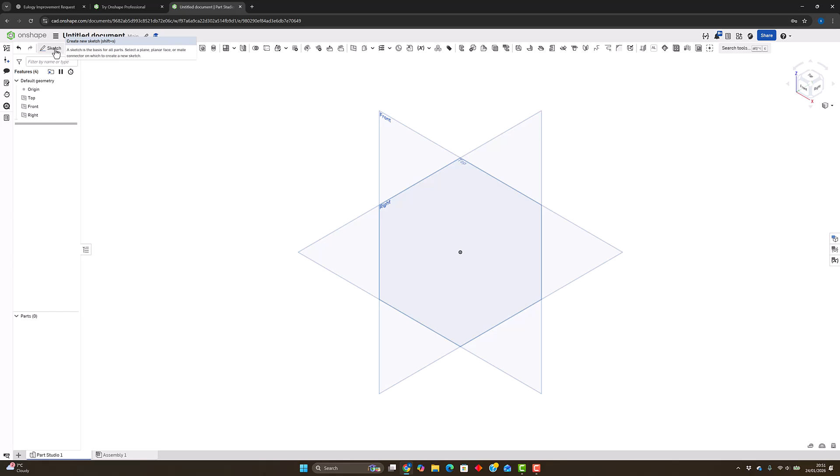So I'm just going to start by creating a revolve. It's something we've not covered on the channel yet. So just like with an extrude, we start a revolve by clicking on sketch. My mouse has just moved up to sketch there, and you'll see the red circles appear when I click. It's then asking me the sketch plane, so I'm just going to click front and then press N. So we've got our front plane there.

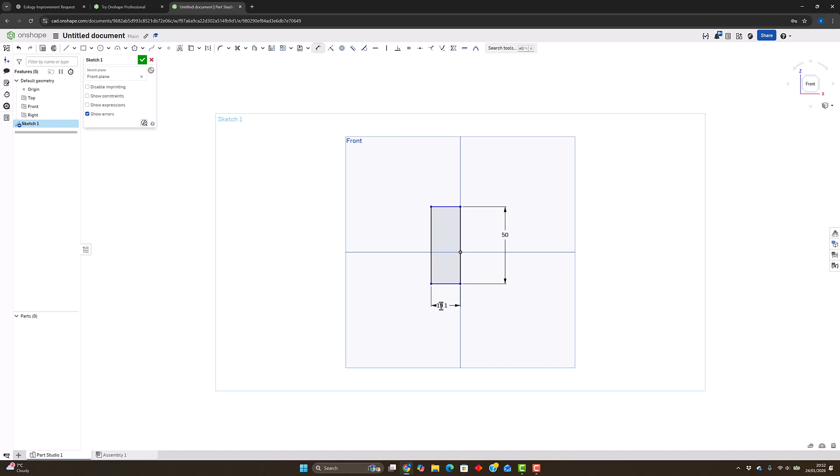Now I'm going to start off by using the corner rectangle, and I'm going to draw a rectangle top to bottom there and dimension that. So this piece is 50 and it's going to be 25 wide. And from the bottom line there to the centre line there, we're going to put that in at 25.

Now it's important when we do a revolve, we're going to revolve around this centre line here, so that's the one that's now highlighted in orange. So I need to keep everything to that side of it. So I'm on the left hand side here. I'm then going to do another corner rectangle just in the bottom here, and we'll resize that to 25 by 10, and I'm going to use the trim tool to delete these parts here.

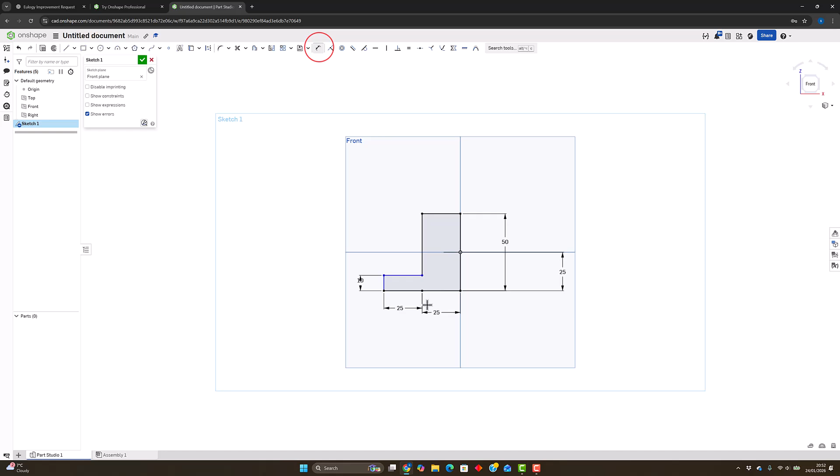Now you will notice that's gone blue. It's because that line is now not locked in place. So if I just put the dimension tool back on, it's now locked in place. So we've got a completed sketch. So I'm going to press the tick. I'm just going to drag this so you can see it in 3D.

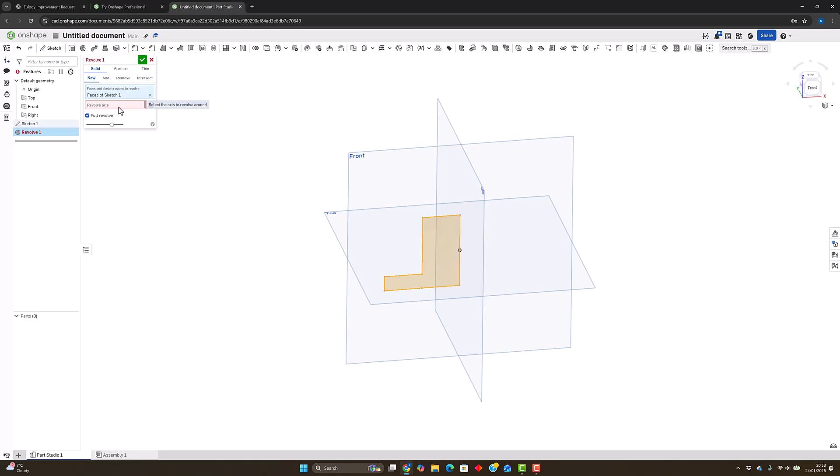And along from extrude, we have Revolve. So I click on Revolve, Faces and Sketches, well, it's sketch 1. And my Revolve axis is this line here. And straight away, it spins round. It looks a bit like a top hat. But imagine this is a foot to go on or something. And what we need to do is we need to put a nut in the top here so it can be threaded on. So we use the captive nut tool.

So you would just press plus and type in captive nut in there. Now I will warn you, it does take a bit of scrolling down to actually find the custom feature. There's quite a few other captive nut documents that it finds, but we are looking for the custom feature. So eventually that one there, captive nut, is the one we're looking for. So mine is installed up here.

So I click captive nut and we can pick our standard. So ISO, ANSI. I'm going to leave it on ISO. I'm going to pick a 10mm nut. It's hexagonal. The nut type is regular or nylock. I'm going to leave it as nylock. And from the menu there, what we've got to do is points to place pockets. So basically, where do you want to put your captive nut?

So we use the make connector button there, and I'm going to click the top, and you'll see the nut comes in. Now this is the great bit about it. If I decide that actually I want it to be an 18mm nut, it automatically updates. So I can change the size of my nuts, pardon the pun, quite easily. So we'll leave it at 10mm there.

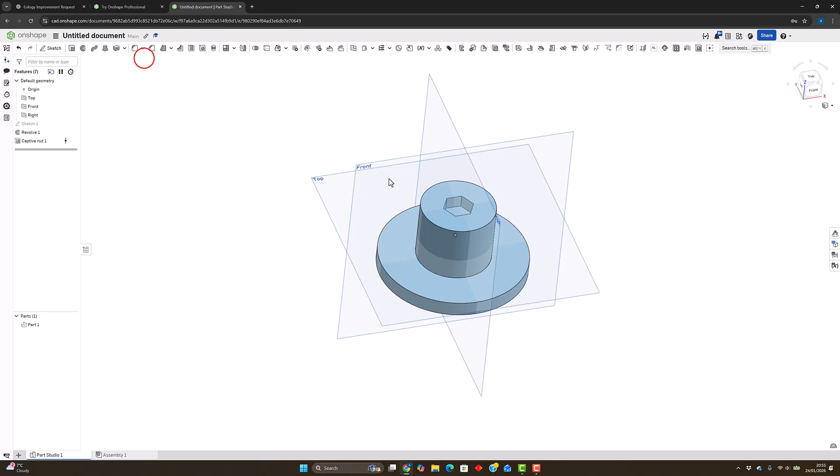The last thing we have to do is tick merge with all. Sorry. Turn that. Click merge scope part 1 and then merge with all. And when you press the tick there, you will then get your captive nut.

So what you could do then is, if you wanted this to be hollow, or you wanted the bolt to pass all the way through, I could click on there as sketch, and from the centre there I can do a hole which is, not slightly bigger, slightly smaller than the nut there. We make it 17.5, so it's just slightly smaller.

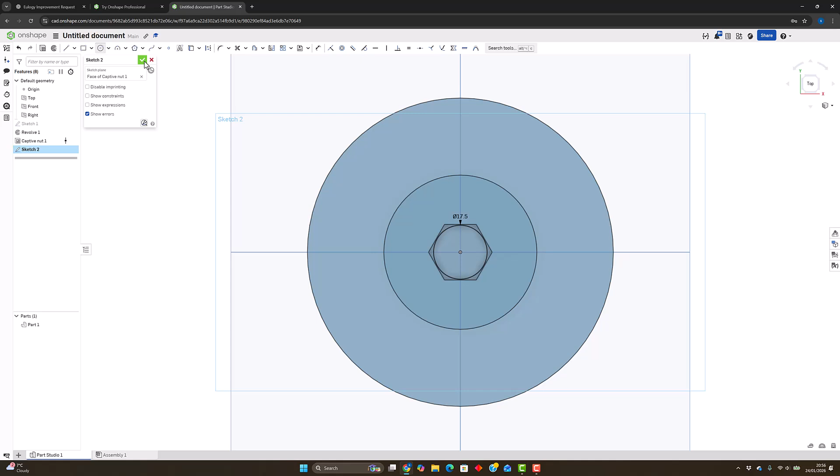Press the tick, click on extrude, sketch, remove material, and if I press the tick there, you can then see there's a chamber or there's a hole underneath that the thread for your bolt can pass through.

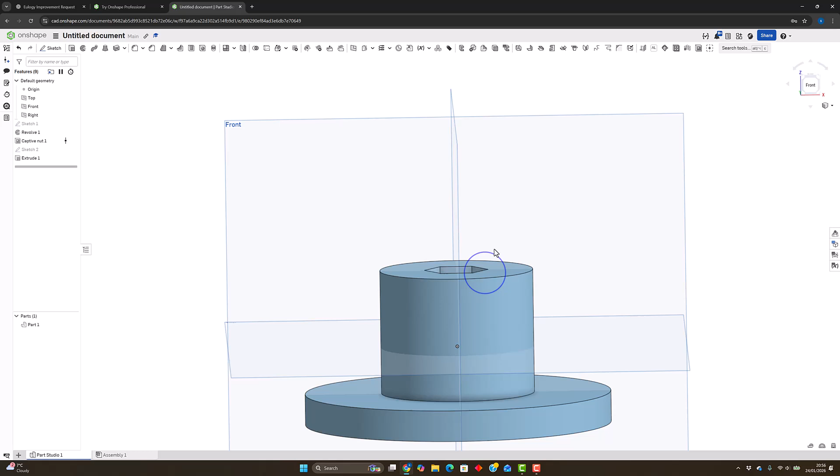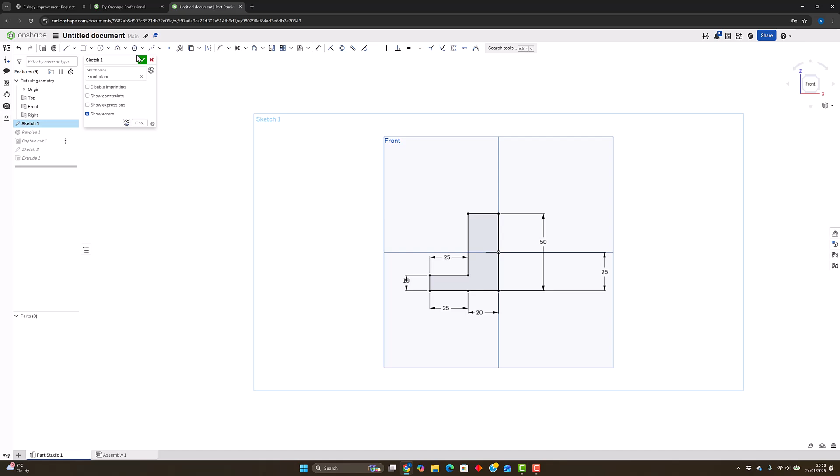Now another thing I love about Onshape and most CAD packages is I can go and make changes rather quickly. So we can see the nut in there, and what I'm straight away realising is that this top part is too large. So if I go back to sketch 1 and press N, if I reduce the size of this part here, it's all going to move in, so it's now 20. So if I tick that, it's automatically updated.

And again, I could go and add something like a fillet here if I wanted to make my leg a bit more ornate. Okay, so that was a quick one today.